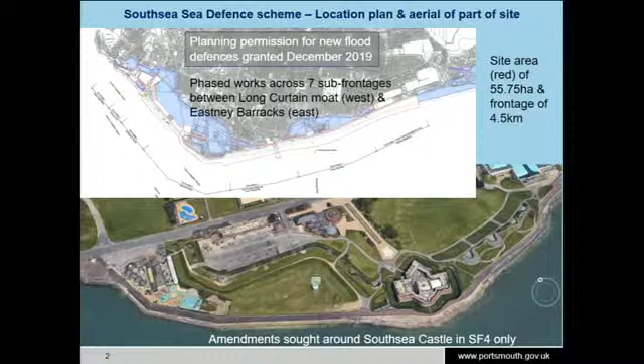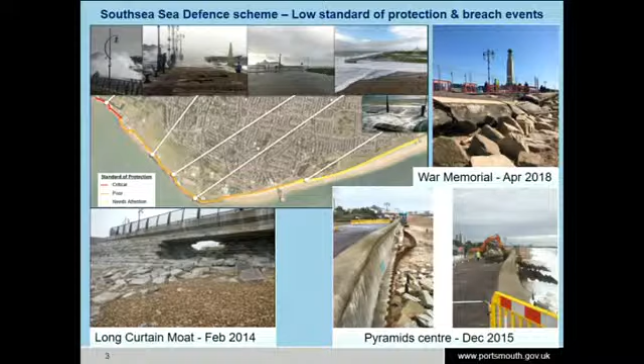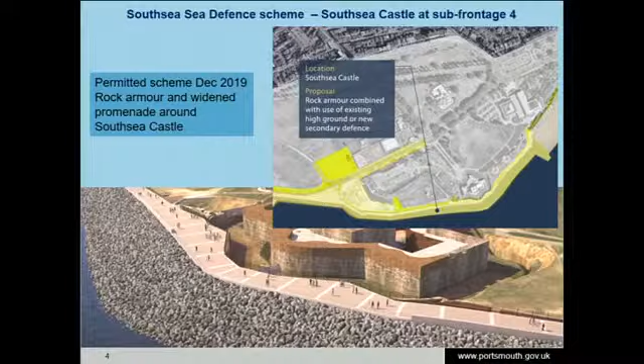This was the scheme granted in December 2019 for sub-frontage 4. You've got a widened promenade that's raised and a rock armour revetment, with the high ground behind it being the secondary defence.

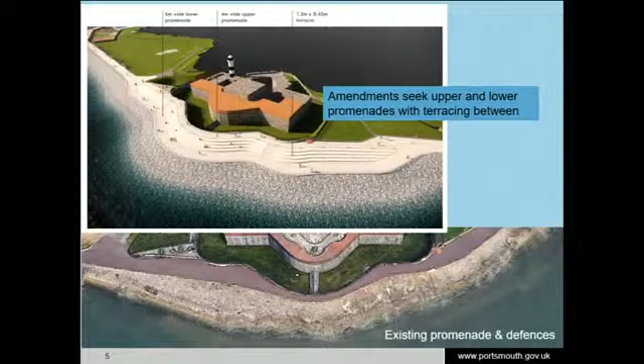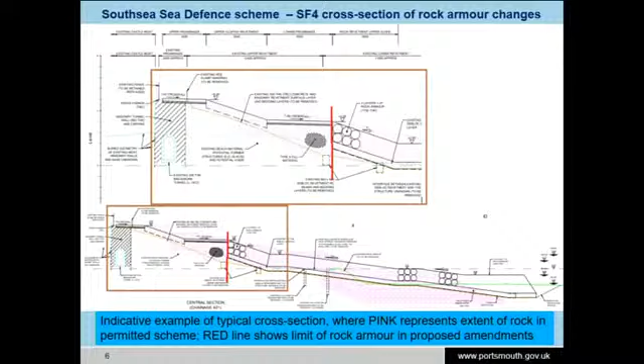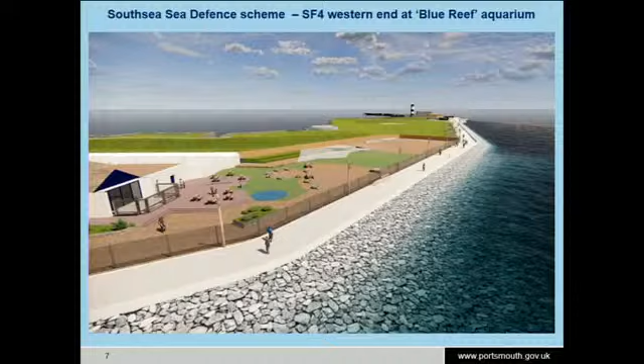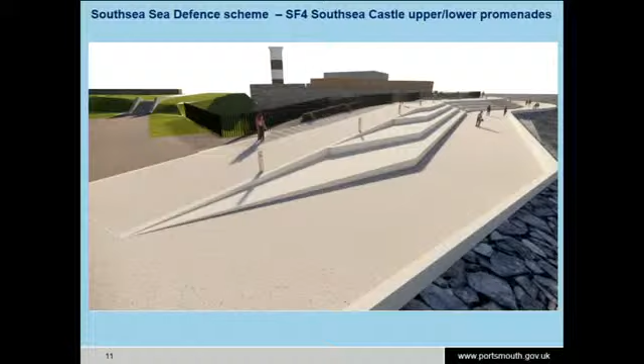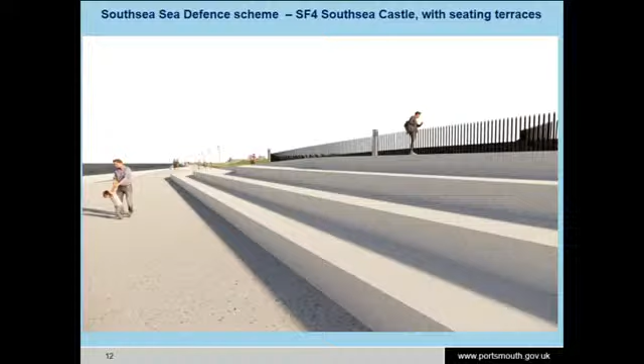This is obviously at the lower promenade, looking at those terraces. And this is on the terracing, looking back towards Bandstand Field.

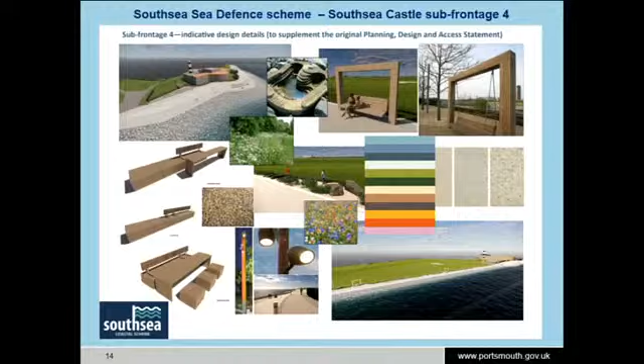Last image, please, Ade. This takes you back to flood zone 1, sub-frontage 1, where construction works have already started. The planning committee considered detailed materials and other street furniture in November 2020, and there is an expectation that there will be a consistent quality of materials for future approval for this particular sub-frontage.

You've also got key responses from statutory consultees. Natural England note the environmental impacts either remain unchanged or see minor improvements, and Historic England summarise the design changes as an improvement and significant benefit to the scheduled site.

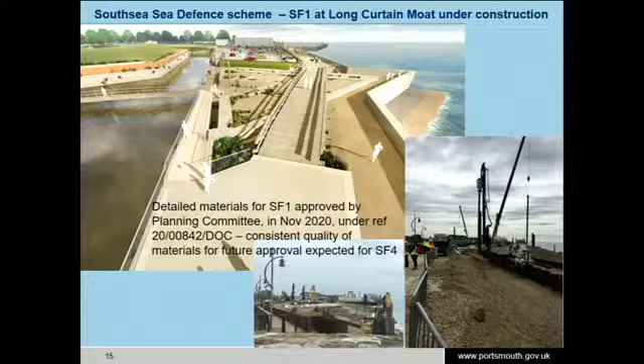Councillor Atkins: I just wanted to be absolutely clear. I think probably everyone in the committee understands, but just for complete clarification, we've seen quite a lot of this report before and already given permission to a lot of elements of the coastal defence scheme. Today it is a request to vary something which relates to the whole scheme, but in terms of the different types of sea defences used, it's only proposed to change one section of the design we've already approved, which is the section around the castle, in order to create the two-tier pathway. Is that correct, essentially? That's perfect. Absolutely.

Yes, and a lot of the things that were requested in the deputation are covered by the conditions.

Councillor Atkins: I think the deputation makes an interesting and potentially good point, which I was going to ask about - rock pools, and would this be a site that would be possible to incorporate vertical rock pools to enhance biodiversity, and does anything we decide today affect that? I asked this question in the pre-agenda and got a fair reply. But Alan, are you okay to answer that one?

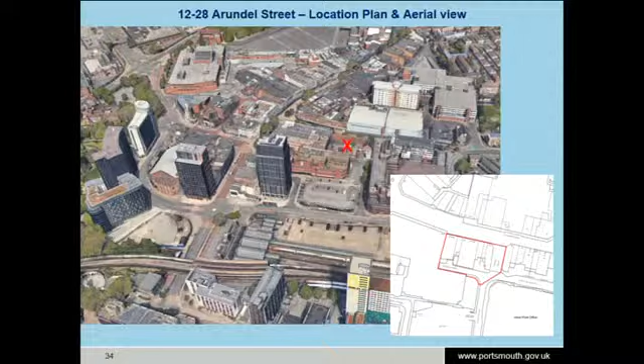Thank you, Chairman. This is 12 to 28 Arundel Street in the city centre. The application is for a student purpose-built halls of residence and commercial redevelopment on the ground floor. So Part 7, Part 28, Part 21 storey building. You can see the site on the screen in front of you, on the southern side of Arundel Street, immediately adjacent to the previous Debenhams building.

We'll just have a flick through - so there's the site, thank you, Eze. The proposal, as I say, is a substantially tall building containing 591 individual study bedrooms for students and 3 commercial units on the ground floor. I'll just let Eze take us through some of the images that I'm sure you're all fully aware of.

We'll pause there. Members will notice, of course, we have slightly amended how we present things in your agendas, so we do have a lot more imagery in the agendas as well, so I will try and fly through the imagery to make it a bit easier.

The ground floor - this is arranged with Arundel Street at the top of the slide, and obviously coming back round Yapton and Church to the bottom of it. You have 3 commercial units on the Arundel Street frontage and an area of shared back of house in the centre, that orange block coming in from all sides. You then have refuse, plant and cycle storage within the middle of the cores, and along both the eastern and southern side, you have the entrance and facilities associated with the purpose-built student housing. This does include a small basketball court on that southeastern corner.

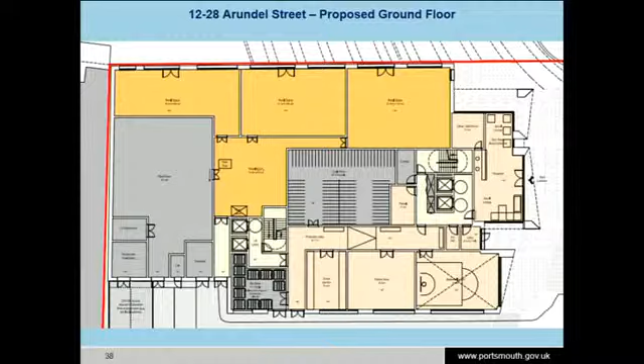As we go up, the first floor on that eastern side houses facilities for students. You can see recreational spaces and study spaces facing outwards, and then the beginning of the mixture of study bedrooms on the first floor and going upwards.

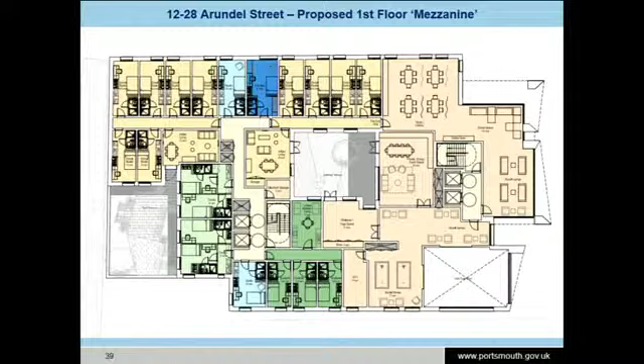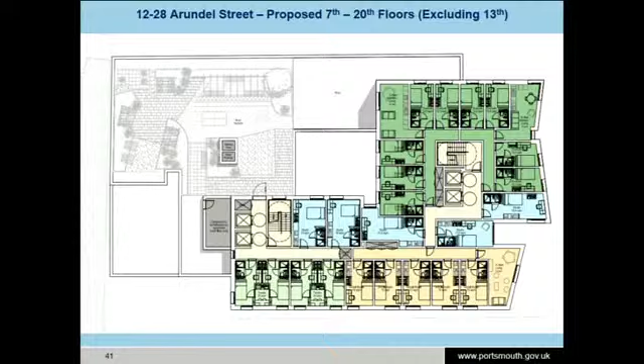You will also note external roof terraces and an internal light well. It obviously goes up from there with a variety of mixed space. Some are individual bedrooms, some are studios, i.e. bedrooms with ensuite bathrooms sharing a small kitchen. Some are arranged in the cluster flat formation. As you go up, we have another 7th story roof terrace, and as you'd imagine, student bed spaces as we go higher still.

Illustration of the issue. Key issue here for the design of the building. This is seeking to illustrate, from those three bottom images, the fact that the designer, after a lot of work with the council, has divided the building into three different sections.

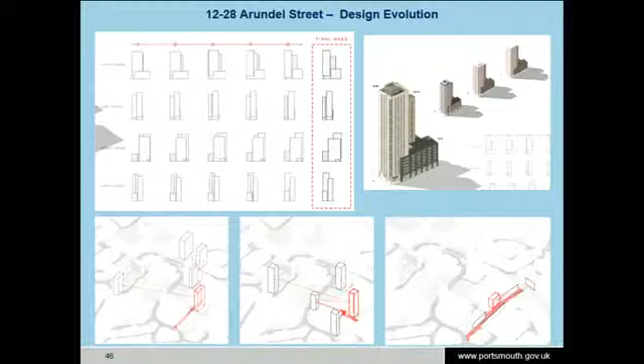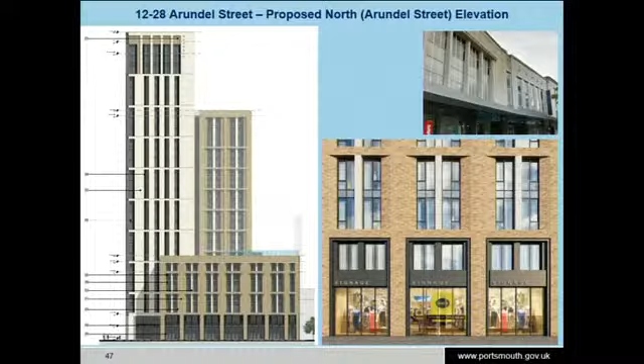It's a single building, but it helps to perceive it that way for the views that it will have. The building fronting Arundel Street is a 7-story building, so it has a very human scale, relatable to those walking up and down Arundel Street and approaching it from the east and west. The two towers set behind it, of 21 and 28 stories, will equally be viewed in those larger images. Some of these images are also replicated in your agendas, and you'll see how they've taken some architectural detailing from existing buildings within the city centre.

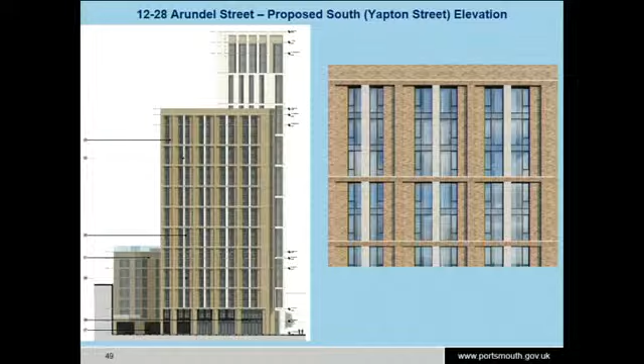As we flick through these, which I think are self-explanatory, I will just note there are no objections from any statutory consultees, and three letters of representation raising concerns as mentioned in your reports.

I will pause there. As you can see, it is a tall building, undeniably. Members will be aware that the law regarding tall buildings and building safety associated with fire safety is changing and has changed. The procedural issues associated with them affect only buildings submitted for planning permission after the 1st of August. So the procedure for considering fire safety for tall buildings is unaltered for this scheme, and it's what you have always done - considering fire safety in the round, recognising that building regulations will match and control fire safety issues. We have worked closely with building control, and they are satisfied that all appropriate fire regulations within the building regulations have been properly considered.

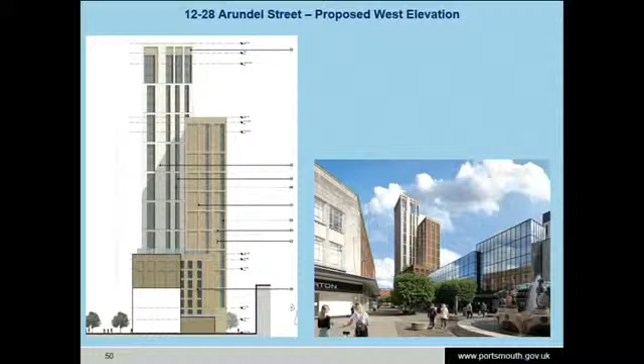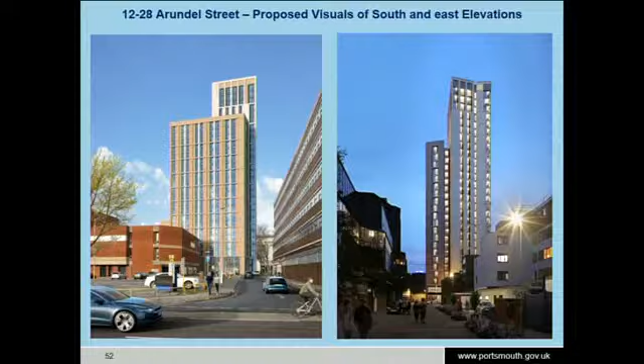The building is principally, obviously, in the city centre. It straddles the two character areas in the 2013 city centre master plan SPD, which supports both tall buildings, in line with our tall buildings SPD, and focusing opportunities for growth and development that would encourage and transform the city centre's economic, social and cultural focus, as covered in the report.

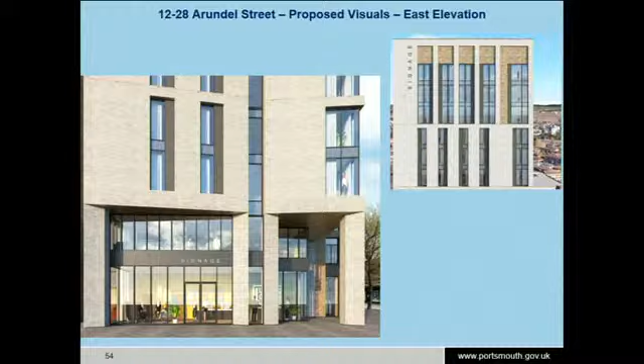As mentioned, on the ground floor - you can see the corner of the building there, that's Yapton and Arundel - it has three commercial uses and then the entrance to the student space, so it's active frontage all the way around, a big change from what we have along that eastern and southern elevation at the moment. I'm saying commercial, not retail, because the use classes order has changed and commercial and service uses are now lumped together. So it will be for the site owner to market those units and occupy them with either retail or food and beverage - a cafe could go in there, or indeed any other use within Use Class E of the use classes order.

As mentioned, we've had three letters of representation. One concern raised was regarding amenity. This illustrates the degree of separation from adjacent residential tall buildings. We are satisfied there is no unreasonable impact on amenity to those residents. It is a tall building, so it will cause some shadowing on Arundel Street, but there is already shadowing there from existing buildings in the area, and again we're satisfied that's not of particular concern.

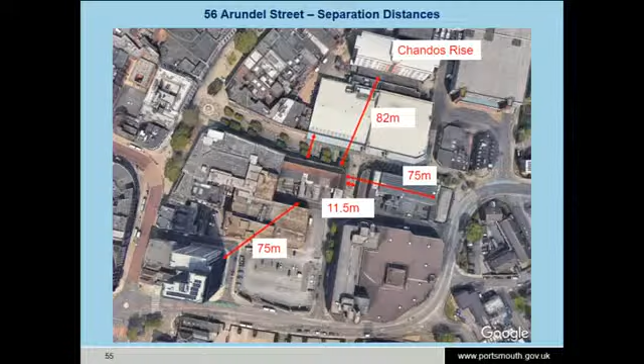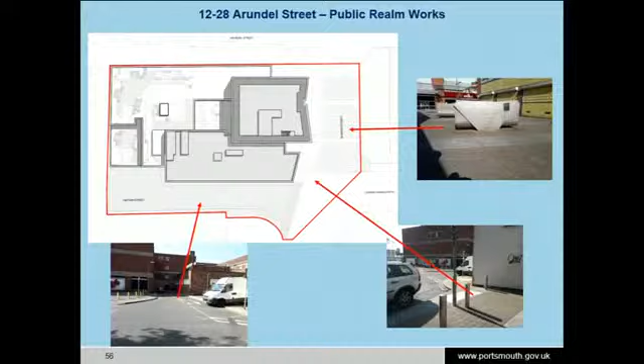The applicant has worked closely with the council's landscaping officers to look at the specific immediate public realm around the building. There's well-valued, high-quality public realm landscape in Arundel Street currently, which we're not looking to remove. As we turn the corner into an area that isn't publicly attractive at the moment but will become more active with this development, an individual negotiation has achieved a £50,000 financial contribution to the council, to be spent on improving that public realm through illustrative schemes the landscaping team have been working up. So specifically, a Section 106 payment would come for that.

The scheme has no objections from any consultees, so all the issues such as ecology, drainage and SUDs have been built into the scheme from first principles and are entirely acceptable to your professional officers.

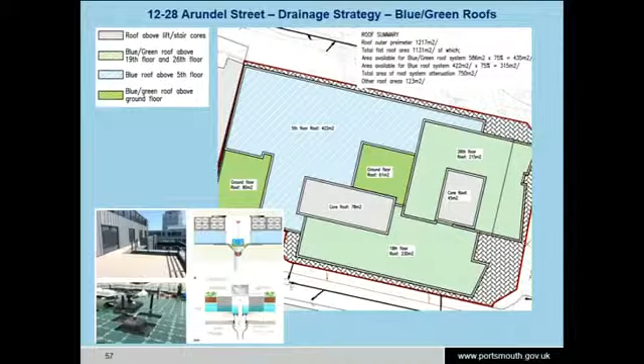The purpose of this is to highlight the context that this is a tall building. It will be the second tallest residential building in the city, but this is an area of substantive change, and going forward we anticipate a need to put higher density, taller buildings in this part of the city centre to support economic growth, to meet our housing need, and to regenerate and change the activity that the city centre offers the wider community.

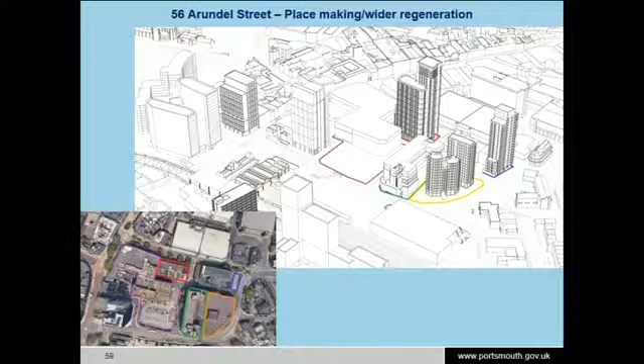So while it's a tall building, we are entirely satisfied that both in its immediate context - that 7-storey building on Arundel Street - and in the longer views and wider townscape, it will be appropriate, and will be one of many buildings one sees as one approaches or moves around the city in the skyline and cityscape of Portsmouth.

Just flicking through my notes to make sure I've covered everything I wanted to pick up on. There is an extensive number of planning conditions dealing with both the specific management of the site and some details we're looking to nail down, such as architectural detailing of windows, etc. We're satisfied that covers all those necessary matters.

I've covered amenity to neighbours, which I think is important. Would note highways impact - no objection from the Highway Authority, but there is a slight under-provision of cycle storage. There's 176 spaces for cycle storage within the building, so while that is slightly lower than the arithmetic of the parking standards SPD, we are satisfied that is a reasonable design for it.

The ecology of the scheme - both bird aware and nitrate nutrient neutral solutions - have all been built into the 106 and agreed with the applicant, and on top of that the site is liable for around £2.5 million of CIL, as mentioned in the SMAT, which would deal with other infrastructure issues in the wider city and immediate locality.

In conclusion, therefore, it's an ambitious building, but it's one we think that Portsmouth deserves. It deserves that ambition for its city centre, where we need to focus our growth and opportunity. It brings back a secondary frontage into active usage with those new viable spaces on the ground floor, and it provides for a need for the city - 591 student bed spaces.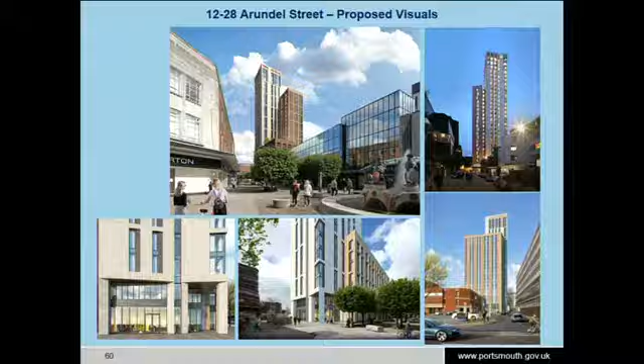Thanks for that reminder. Yes, sir, what's your name, because you weren't here when I first came out. I beg your pardon, it's Michael Lampard. Mr. Lampard, would you like to give your deputation? Thank you, so I'm Michael Lampard, an architect. We work for Christopher and Wright, we're Fusion Students Architects, and I'd first like to thank Ian and Eze and Gary, who's not here, for the time they've taken with us to define and refine this scheme.

And also thank you to the councillors for considering this today. The application provides, as Ian's identified, student accommodation, 591 rooms in the centre of Portsmouth. We believe it's much needed in the city, helping to free up HMOs, as we just discussed. The student demand report identifies a continuing need for students in the city and good quality accommodation, which Fusion provide. We've undertaken extensive discussions with your internal team, thanks for that as we've gone through the process. We've also undertaken a full day of design reviews, which was very positive and helped us again to refine the scheme, and we liaise directly with stakeholders and wider public through our communications agency, Marengo. So throughout the process...

I don't mind. Joe, beg your pardon, if you go out at this stage, you won't be able to vote on it, is that all right? Sorry, I beg your pardon. I know you didn't, I saw you headed off, I thought you might be headed for a drink of water, is that all right? I'm so sorry. The alternative is that after the deputation we just adjourn for a couple of minutes, Chair. Yeah, would that be all right? I beg your pardon, can we just hang on for a little break? Yeah, Joe, do you want to shoot off just for a few minutes? Oh, I can go now? Yes, I beg your pardon, I'm so sorry, everybody knows what you're about to do. Well, hang on, could we perhaps let the deputy finish? I do apologise, Councillor Hooper. Pardon? Should we let the deputy finish first, perhaps, Chair? She's on her way now. You know, hang on, sorry, I beg your pardon, sorry to muck you about.

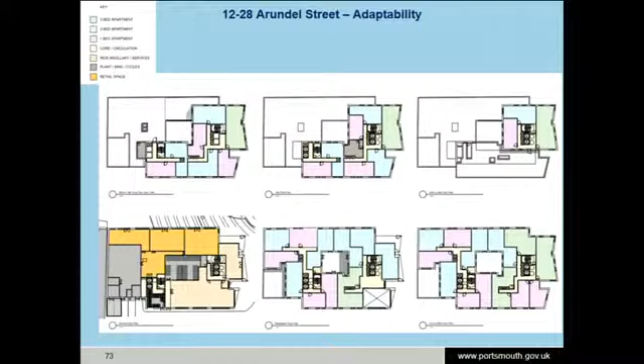I've been just looking at the street view and satellite pictures of the existing location here. And I'm asking myself, overall, do I want this building for the city or do I not want this building? And I'm coming to the conclusion, I think, on balance, I think it would be better for the city that the building be built than not be built.

Now, I don't think any of us are sort of overly keen that it's student accommodation. We would rather see affordable housing. But I think one thing this applicant has done that does impress me a lot is has considered the possibility of

conversion if necessary. I think this is an area that is in bad need of regeneration, and I think, as has been mentioned by others, this is a high quality design building, more of the Gunwharf style, more of the

type of regeneration that would fit with the future regeneration of the city centre. And I think particularly the different heights and scales of the different buildings. So yes, the tallest part is very tall, but it's not here. It's not the whole of site. It's a narrow area of the site. I think overall will be attractive to the skyline and is suitable for a city centre location.

This isn't on top of a lot of other residential housing. There is some other - I do recognise there are other flats in the area, but it's not in a suburb. It is in the city centre. It will add much needed footfall to commercial road.

I think the building is high quality, the design is high quality, and the management that we've heard about so far of how the building will be managed for students is of high quality. So I think this is a building that I think overall will benefit the city.

I think something which was mentioned, and obviously CIL can always change as the building progresses and costs go up or down, but the idea of I think it was 2.5 million CIL for Charles Dickens is also extremely attractive. Even if it's a tenth of that, it's something we can do a lot with for that area and for other parts of that ward that could see the money improve.

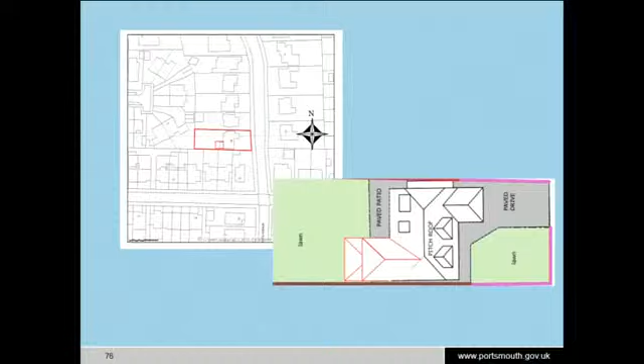When this application was put forward, we received a number of objections from nearby local residents and neighbors, especially those to the south, where we received 4 objections. The objections mainly refer to the depth of the development in question, the proximity to the neighbors' boundaries, the use of render rather than natural brick, which would make it more compatible with the host property, and the loss of daylight and sunlight, and including, lastly but not least, the loss of privacy to rear gardens.

This application, as presented, had before officers had looked at these objections, the case officer, I believe, had gone back to the applicant and requested further amendments to the scheme, mainly a reduction in the depth of the proposal and also changing the materials from render to materials compatible and similar to that of the existing property.

Officers have considered the issues and main considerations I've mentioned previously and the neighbors' representations, and looked at the depth which can be seen in this slide: 4.7 meters for the first floor element of the proposal, and 4 meters depth for the ground floor element. An officer's considered opinion is that the impact on amenity is mitigated, especially with the reduction in depth of the elements, and also with the materials changed to make it more compatible with the host property. The proposal in question is due north of the gardens to the south.

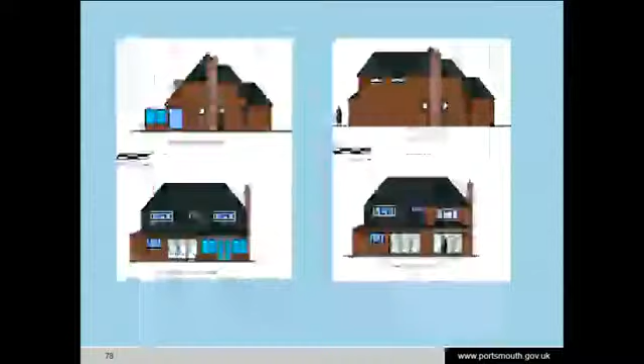I have a couple more questions, if you don't mind me carrying on. One of the deputies has submitted - I don't know if the planning officers have seen it - a picture showing he's superimposed the extension onto the garden. I've had a quick look online and it looks to me like it's roughly accurate. Would you agree that because the extension does appear from the plans to extend beyond the boundary of 31 - would you comment on it in any way? Do you think it's an accurate representation of what the view will be like from 31 Mansfield?

Yes, Councillor. I think the clear marker there would be the panels, the fence panels, which we all know are 6 feet by 6 feet. So that will probably come out at 3 meters, roughly 2 meters each panel, with the supporting pillar there. If we were to take the cue from the upper floor, being the eaves, I'll just put that up. So if we take the first floor element being the marker there from the rear, being the eaves of the existing first floor, and look at the panels here, one could then take a cue about what is 4.7. It would just marginally go across the shared boundary with the neighbour there, but otherwise I do not believe that it would go to the extent that's put in the imagery. It's somewhere closer to that.

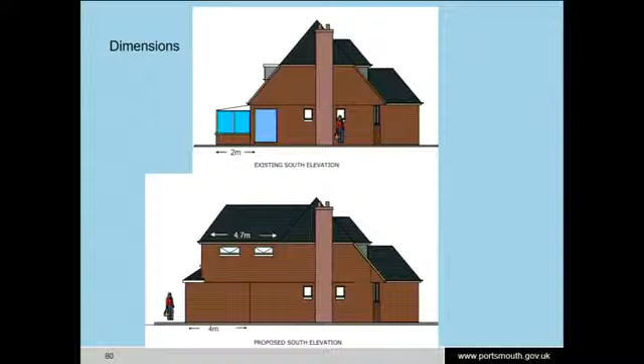It essentially says in 5.8 that officers considered the depth of the extension as originally proposed to be a little too much with respect to the neighbour's outlook to the south, and the applicant agreed to its reduction by 1 metre. I accept also that the bright render was taken away, which is an improvement.

There's a slight vagueness to that statement in the sense that it says a little too much. Is it open to the committee to consider it's still a little too much, or do you feel that you've now dealt with it as a result of the discussions and negotiations that have taken place?

Yes, I'll do it. If I may, members, I think officer reports are written for the audience, so obviously the language there has a little bit of vagueness. It's not just the depth we're looking at, it's the architectural interest. A straight up and down two-storey wall has a visual interest compared to what we now have, which is a bit of single-storey roof form coming into there, which they have now with the existing conservatory. So we're satisfied, as well as the change in the depth itself. One metre doesn't actually make really that much difference, but it's creating greater interest in that architectural elevation in that you do have that chamfered corner.

If members feel that it is dominating the outlook such that it causes significant adverse harm to the amenity of the neighbour, remembering of course it's not the view that is relevant, there is no right of a view in planning, but if the reasonable enjoyment of that home is so detrimentally harmed that planning permission should be withheld, notwithstanding their current appearance, then planning permission should be refused. But clearly at some point it's not worthwhile the householder making the extension if there isn't a gap in there. We're satisfied that coming out that 3 metres as is now, compared to the previous scheme, isn't causing that dominant harm that would require refusal. But that's the judgment simply that members need to make.

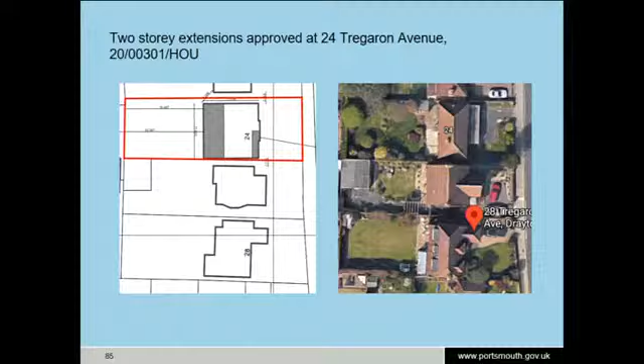Councillor Atkins: this might be a ludicrous hypothetical you're unable to answer, but do you think your advice would be substantially different if it was on the other side, next to 26 rather than as it appears currently, backing on to what's to the south, whereas if it was on the other side it would be side to side with other properties only. Would that improve the situation or make it worse, do you think? Or is that a ludicrous hypothetical?

I would say, Councillor, that if it was to the north of its own site, it would have greater impact on 26.

Councillor Hooper: can I quickly ask, in terms of the glazed window, there are two windows on that elevation. I'm presuming one was already frosted and this is making the other frosted? If I can assist members, on the south elevation they're installing two new high-level windows, so they don't need to be frosted, they're above normal eye height - that's covered by the strict accordance condition. It's on the northern elevation, facing number 26, where there's a large standard window. That's the one we're requiring additionally to be frosted, because otherwise it doesn't affect either of the neighbours who've spoken to you today, but it does allow unobstructed views north towards number 26.

My memory from the plan is that there's more than one window in that room, so there would be a view out. It has the high-level side-facing window to the south and a normal rear-facing window down the garden, which is appropriate for outlook. Okay, thank you very much indeed.

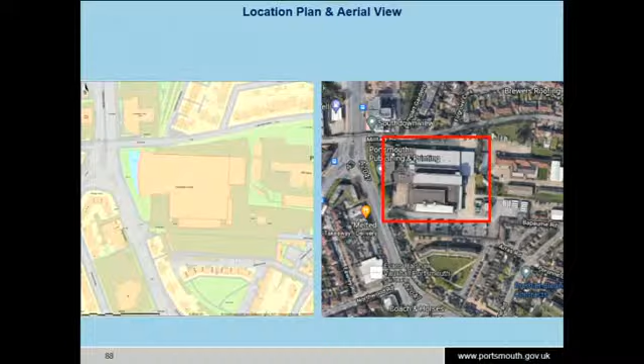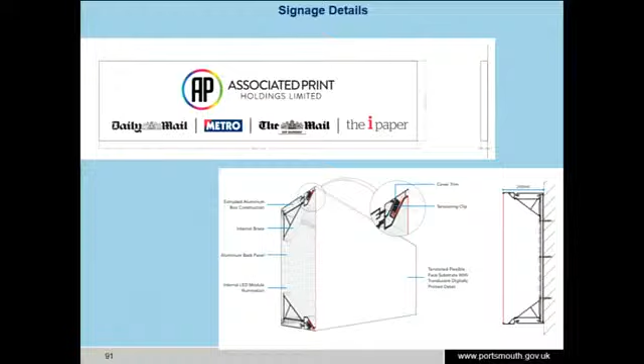Following receipt of the application, an objection was received from a neighbor regarding the proposed signage, on the basis that it will be oriented to the rear of neighboring properties and will cause statutory nuisance, with light pollution and disturbance at night, and further that the illumination would have an impact on bird life and local wildlife.

I've also considered the comments from the local highway authority, and the level of illumination required for such signage. The illumination level would increase marginally, but the key consideration is the setback of the application site and the location of the signage itself, which is around 37 meters, fronting a highway. The impact on the local highway network and on neighbors is found to be quite negligible, and hence officers have passed this to members with a recommendation for conditional advert consent. Thank you.

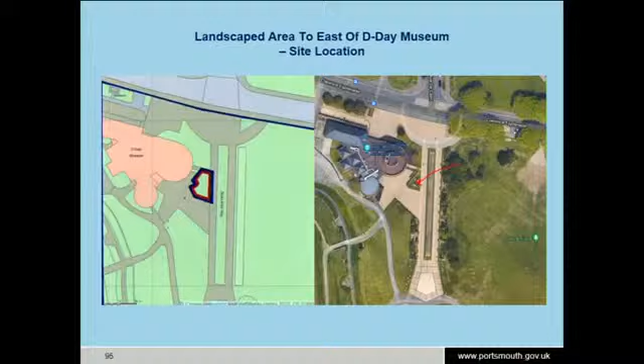The application site is located to the east of the D-Day Museum, and the site is within the conservation area. There's quite a lot of heritage assets - you've got Southsea Castle, and the site is also included in Southsea Common, which is an area included in Historic England's Register of Parks and Gardens of Special Interest. There are also a number of listed buildings and scheduled ancient monuments within the immediate area.

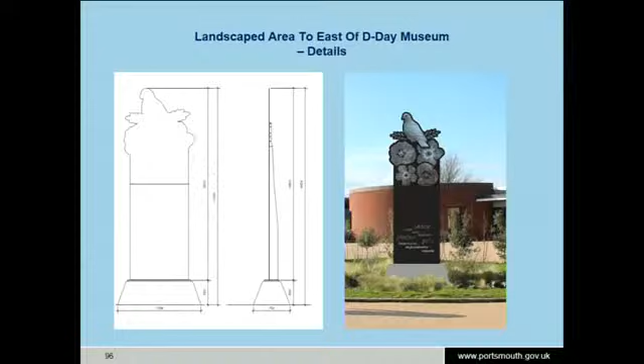Considerations for this installation relate to the principle of it, the heritage impact, and the public amenity. With regards to the principle, it's located in an area with a number of street furnishings, but it's an open park, and it's considered that the installation is acceptable in principle. With regards to the impact on heritage assets, that's been considered, and the view, in light of statutes, is that there will not be any substantial harm to any of the heritage assets in question.

With regard to the public amenity, as said before, it's within a public park, and it's believed that it's well suited for its location. Hence, members, officers have recommended this to yourselves for conditional permission. Albeit it's retrospective, we are comfortable that it meets all the statutory requirements, especially regarding impact on heritage assets. Thank you, Chair. Thank you, Ezzy. Members, any questions?

Councillor Atkins: Sorry, could you quickly repeat why it's retrospective? So why was it installed during the process of the application rather than waiting for the conclusion?

Thank you, Chair. I have no reason before me for why the applicants decided to go forward with it, but my understanding is that it was installed during the course of the application. So the installation did not take place before the application was submitted. In the course of its consideration, it's now become a retrospective application because the installation has now been completed.